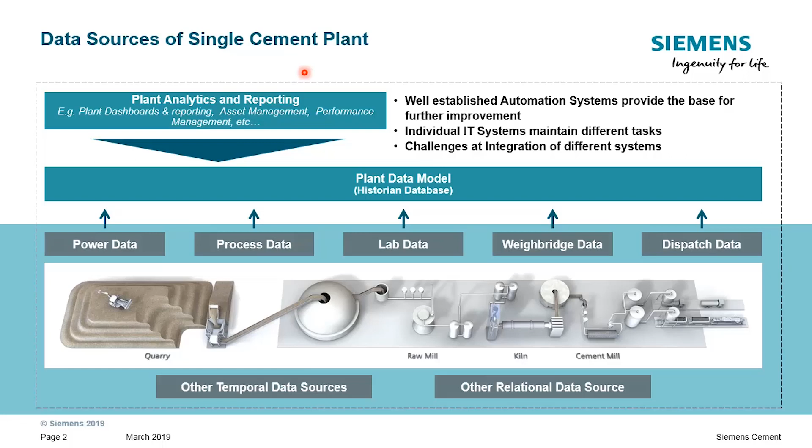By properly integrating those systems under a plant data model, users like operators and site managers have quick and easy access to live and historical data all in one place, as well as they benefit from information generated from the combination of distinct databases. This facilitates routine tasks like plant reporting and dashboarding, asset management, and performance monitoring, and at the same time prepares a data repository for advanced data analytics and process optimization.

As mentioned, the important base for the data in a cement plant is the process automation system. We should be having a solid base as an automation system to be further able to build digital solutions on top of it. In that sense, we are really proud of offering a cement-specific library to the cement industry for 40 years. CEMAT is a leading cement process control system, developed for 40 years as a result of continuous collaboration between Siemens and cement producers around the world.

The main issue here is that cooperation incorporated all the wishes coming from the operators and process engineers who are running the cement plants. In that sense, we achieved globally the market leadership in control systems in cement industry. We have more than 1,000 cement installations worldwide, and the success is based on that real process-based approach.

CEMAT is a comprehensive library with specific features and functions for the industry. Many topics like user-optimized alarm concepts, advanced information dialogues, maintenance features, advanced process control capabilities are specifically developed for the needs of the cement industry. And with CEMAT, we can establish a real solid base for further development in the direction of digitalization and optimization of the cement operations.

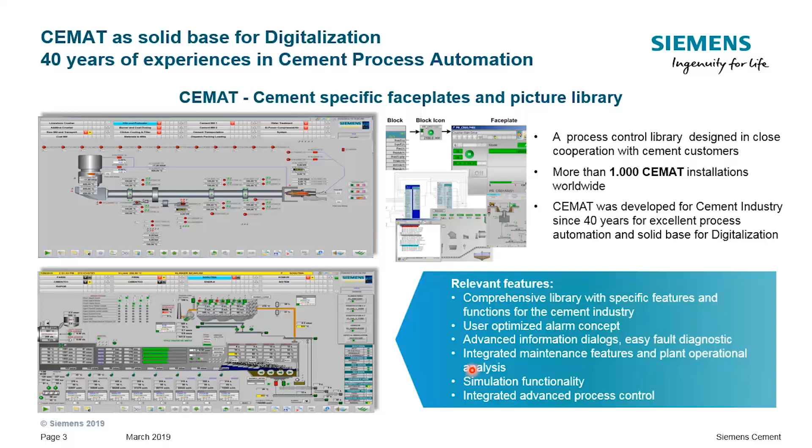We talked about various challenges that the cement customers are facing related to lack of skilled personnel and distributed operations. So having key experienced operators to run the plants everywhere is not an easy task.

So in that sense, it always comes to mind if it is possible to have a central control room to run or at least to monitor different plants. Through its SIMATIC PCS7 framework, CEMAT already enables remote monitoring and control of the plants. To establish a remote operation center is particularly relevant to optimize the personnel in the company. For instance, enabling the best kiln experts to be assigned to operate more plants simultaneously from a central control room.

Our concept for central control room design allows the balance between on-site and off-site activities without compromising safe operations. Of course, safety here is the key word to manage the tasks for the off-site and on-site personnel to have a safe and secure operation.

Another important topic is, of course, cybersecurity. Industrial cybersecurity becomes more critical as operations are performed remotely. As a leading provider of industrial security, Siemens is actively engaged as one of the founding members of the Charter of Trust initiative. Our portfolio is based on the defense in depth concept, in which our systems, products and services are integrated to ensure secure remote access at both application and network level.

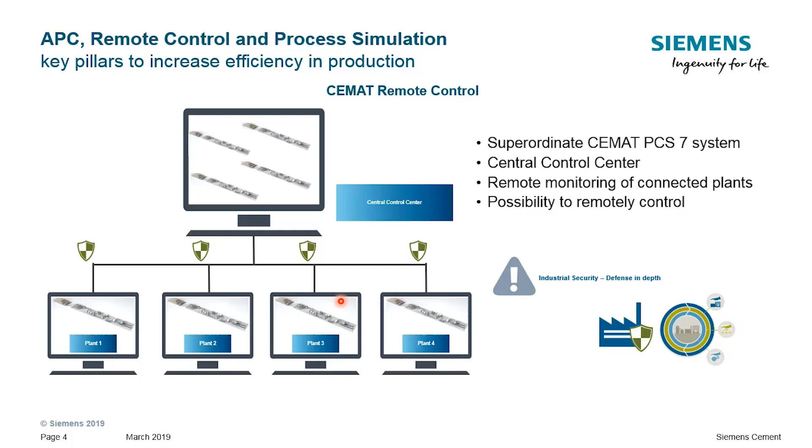We already mentioned that the success of CEMAT is based on the collaboration together with our customers and the feedback that they are giving to us. In that sense, we are continuously improving our solution. An example of a recent development is recipe management functionality, which results from a clear challenge to produce different cement types at the same production line and with short intervals. So we call it scalable production control.

The idea here is it could be different applications like cement grinding, preparation of the raw mix or kiln firing. The idea is to define the parameters for a specific cement type or for a specific application so that the operators can immediately start with the production, and if they want to change to another cement type, for instance, with a mouse click, easily change to another parameter set.

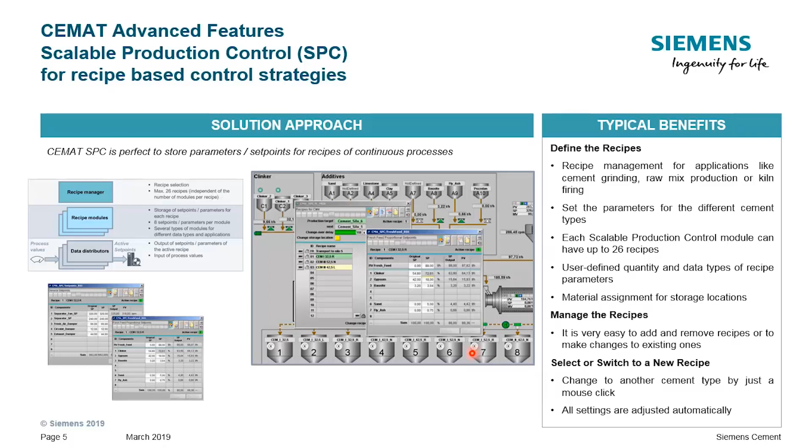It will help also our cement producers to manage the challenges coming from the environmental regulations or CO2 emission regulations, like generating different cement types, for instance, less clinker in cement and different types of additives in grinding of the cement.

So we started this presentation by highlighting the importance of the plant data model as basis for digital technologies in a cement line. Since many cement producers have several facilities, often distributed across cities, countries, and even continents, the next level of digitalization is to create enterprise operations transparency while connecting these plants to corporate and management levels. In concrete terms, real-time connectivity to multiple cement plants enables to centralize technical and management tasks at corporate level, optimizing personnel allocation and minimizing fly-in, fly-out efforts to remote areas.

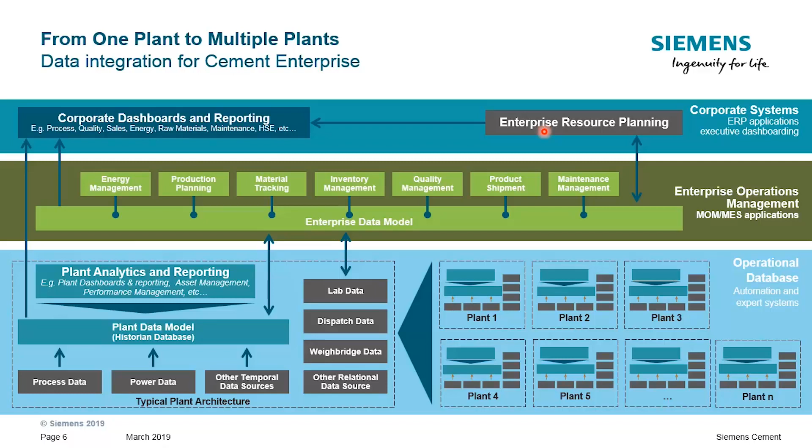As an example, the creation of an enterprise operations data model allows standardization of concepts, indicators, and reports in different production sites and facilitates performance comparisons and internal benchmarking. Integration with enterprise resource planning systems opens new perspectives for operating cost analysis driven by correlations between financial and technical data. In a further stage, this model can incorporate quarries, ready-mix, and concrete stations to generate end-to-end management functionalities such as comprehensive material tracking and overall production planning.

As presented earlier, our CEMAT automation solution is the perfect fit for remote control or basic remote monitoring functionalities for cement plants, which are based exclusively on process values. However, applications that require real-time visualization and analysis of multiple databases or multiple plants are better covered by our operations intelligence solutions.

Our typical solution package includes data connectors to access in real time the existing information network, data modeling to contextualize multi-source data, and a visualization layer with structured views for different users and drill-down capabilities. Templates for the cement industry are available, but we can also generate dashboards and report views according to our customer-specific needs.

Typical questions addressed by those solutions are, for instance, which mills had the highest and/or the lowest operational costs this month? What's the current benchmark for kiln energy efficiency? With the current pace of production, will I reach my sales targets for the week? What reasons have been reported that led to the decrease in efficiency in the cement line? What areas or equipment are not currently in operation?

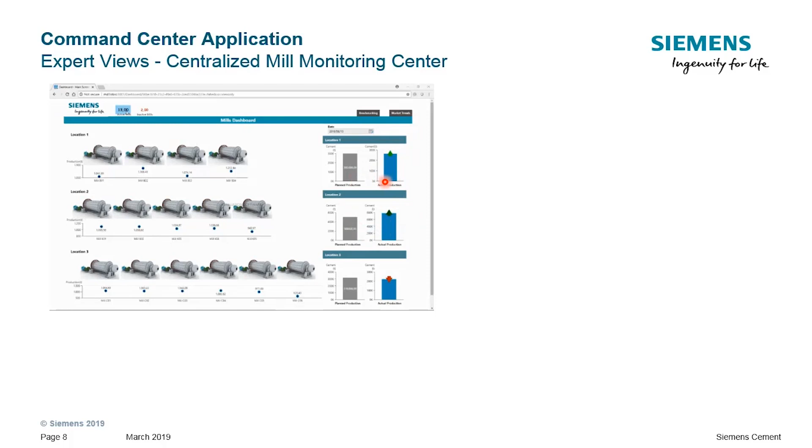So now let's take as an example the following demo system where several cement mills from different locations are monitored by a central system. As can be seen, the live status of all mills is presented on the main screen, where total production can be easily compared against production targets. The user can also drill down to a specific mill screen in order to get more detailed information about the current performance.

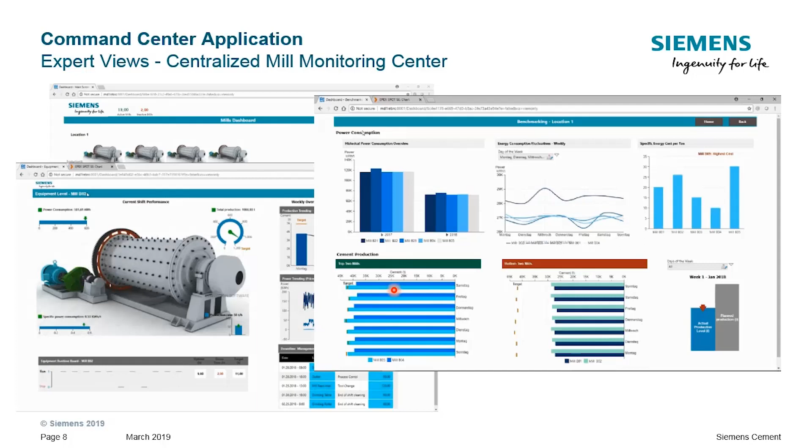As an example of analytical possibilities shown on the right-hand side, through statistical analysis of power consumption and price of electricity trends, the total grinding energy cost profile can be forecasted for this mill and used as a basis for increasing energy efficiency. Lastly, performance benchmarking can be carried out through the analysis of historical KPIs of all mills, such as specific power consumption and cement production.

As previously said, besides generating operational dashboarding and reporting, an enterprise data model is also the information backbone to integrate the complete operations value chain. Here is a practical example coming from a neighbor industry. The customer is Vale, the biggest iron ore producer worldwide. Similar to cement operations, this mining company has a long and complex value chain consisting of 38 sites, which include mines, process plants, and logistic terminals. Managing the complete operations was a big challenge, and 17 different production management software were previously assisting this task.

In collaboration with Vale, we have replaced all those systems by a single manufacturing execution system, especially developed to fit Vale's requirements. Compared to older systems, the new MES boasts shorter downtime because of the more modern and robust technology. The increased agility and the reduction of unproductive hours are obtained by the higher level of integration with automation systems that provide immediate and reliable data, besides requiring less manual work and being more intuitive to operators. Less than 1 year after the system was implemented, Vale has estimated around $70 million of savings due to this project, mainly by boosting productivity, improving asset utilization, and optimizing technology costs.

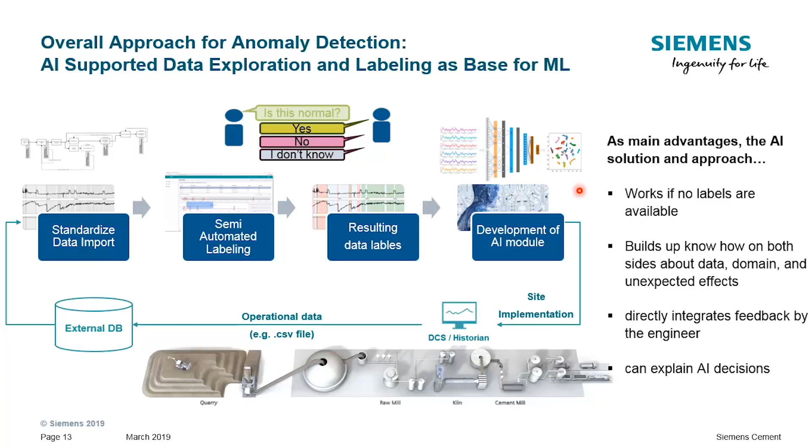But afterwards, the next step comes: we sit together with the experts from production so that we can label the data to understand which is a good operational point and which is a bad operational point. And with that feedback, we can train the artificial intelligence system to achieve either anomaly detection or process optimization.

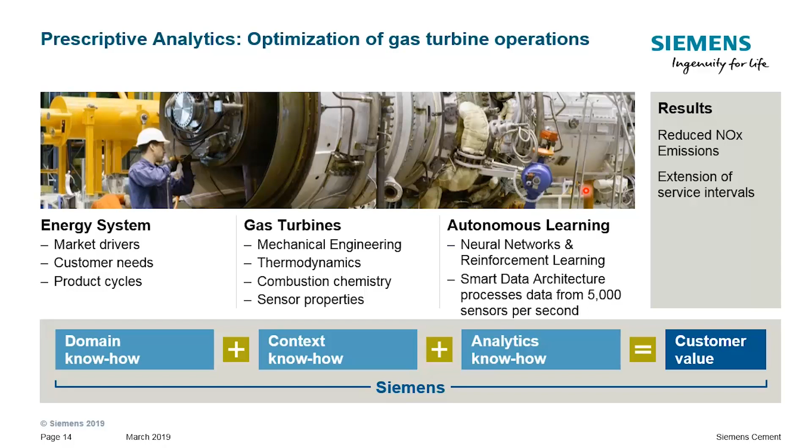Let's give an example from a different field, optimization of gas turbines. Siemens has been producing gas turbines for many years, and of course we have detailed internal expertise on how a gas turbine functions. What we did is use the data and the know-how of the experts to generate autonomous learning and further optimize the gas turbine. As I mentioned, we have more than 30 years of experience producing those turbines.

We have a lot of patents and technologies and the best available turbines, but still there is room for further improvement. The control algorithms established by our experts are achieving a perfect NOx production. But when we use artificial intelligence algorithms and machine learning, you can immediately see the difference. This is the NOx production of a gas turbine with the standard control algorithms, and you can easily see how such a digital solution with artificial intelligence and machine learning can improve that NOx production. The same approach is also used in the cement industry.

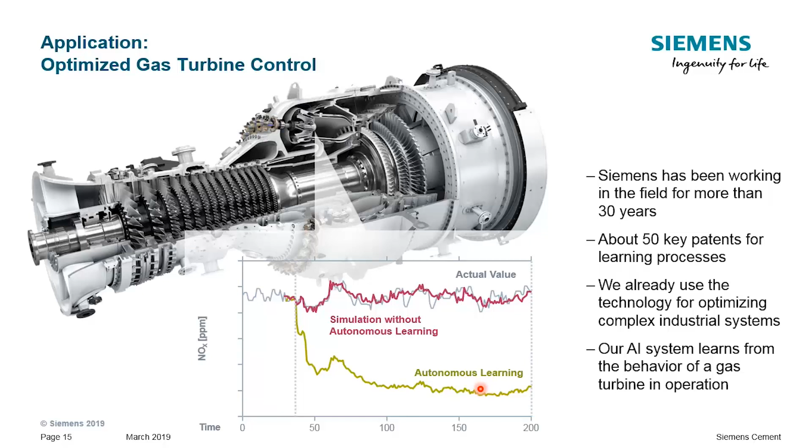For instance, let's talk a little bit about the kiln. I think that is the most complicated process part in cement production. Kiln operators need to produce the maximum potential tonnage of good quality clinker at minimum energy consumption. In that sense, they actually control 4 variables: fuel rate, feed rate, kiln rotation, and fan speed. It can be seen as easy, but in practice, the situation is not so simple. There are many challenges that the operators are facing.

Feed quality is always changing. There is the usage of alternative fuels, where calorific values can continuously change. So operators have to watch many parameters closely, and especially with their experience from historical trends and from the past, they should control the kiln. For instance, they should understand whether the kiln is heating up or cooling down.

As you know, the problem is we cannot really foresee or measure the temperature inside the kiln. There are a lot of different types of instruments trying to measure it, but of course the dusty environment and the high heat inside the kiln bring the challenge that we cannot really measure the temperature, and the operator should really foresee if it is heating up or cooling down. Best performance in kiln operation achieves a run rate of 95% per year, and an average operation can reach 90%. But there are many factors.

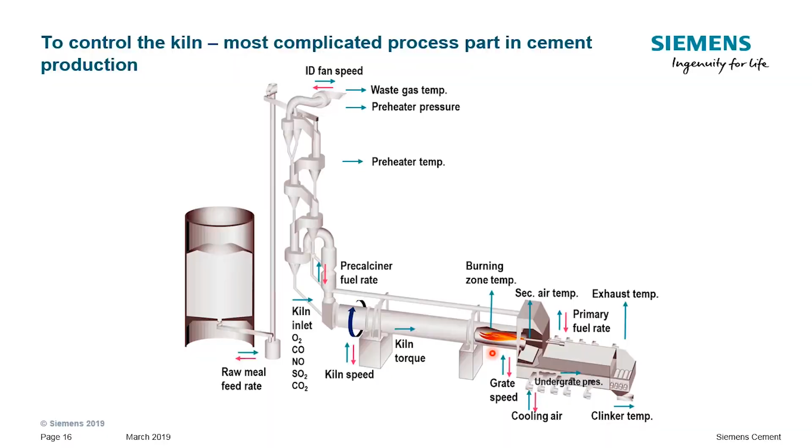With the support of these algorithms and technologies, it's possible to analyze those different data and find the correlations among them. So we can recognize patterns and optimize the process inside the kiln. In that sense, we can talk also about other process parts of cement production, for instance, mills. There is a reference shown here from Portland Cement Plant, Rohrdorf in Germany, where we did a mill control optimization system by using neural networks.

And the idea is using neural networks as a soft sensor to determine the grain size of the production so that we can adjust the variables. And the result is quite good actually. The performance of the mill has been increased nearly up to 8%, and in that sense, the return of the investment was really short.

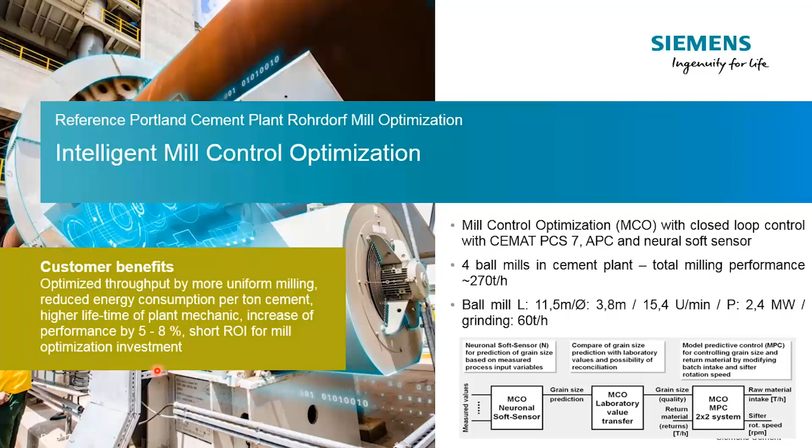Artificial intelligence can also be applied for automatic anomaly detection in regards to equipment health, in order to predict potential failure of critical equipment and minimize shutdown in cement plants. Siemens concept goes beyond the classical condition monitoring of electrical components like drivetrains, motors, etc., being extendable to complete assets. For instance, like a complete mill, including the mechanical components. In that sense, artificial intelligence algorithms enable data analytics into big data as they can identify correlation between different equipment variables and as well as its relationship with failure events.

We can summarize those solutions and offerings from Siemens into two different areas. One is data integration and generating transparency and benchmarking for the distributed operations of the cement plants. Generating executive plant dashboards and of course value chain integration starting from the limestone mine towards the production of the clinker and cement and even transportation and ready-mix plants. So generating manufacturing execution systems.

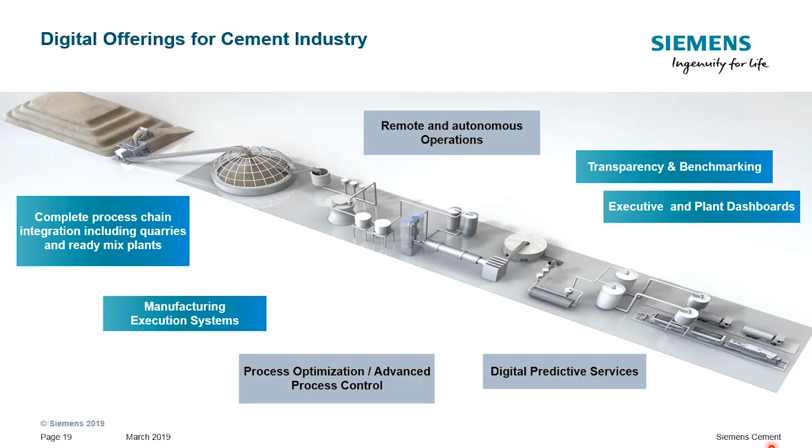And of course, based on artificial intelligence technologies and machine learning, the focus areas are process optimization and digital predictive services so that we can prevent downtimes in the cement plants, increase the availability, increase the optimization and efficiency of the cement plants. I hope after the slideshow you have gained some idea what Siemens could offer you.